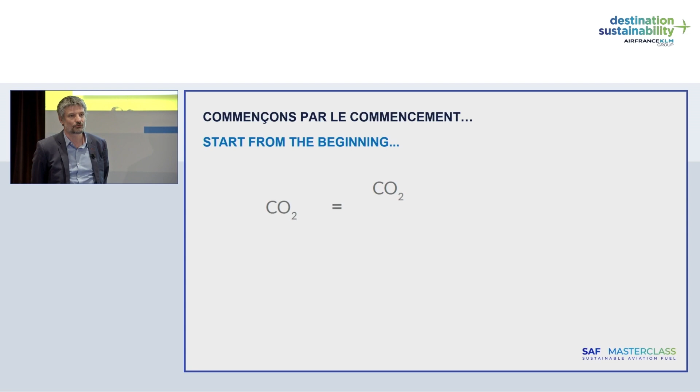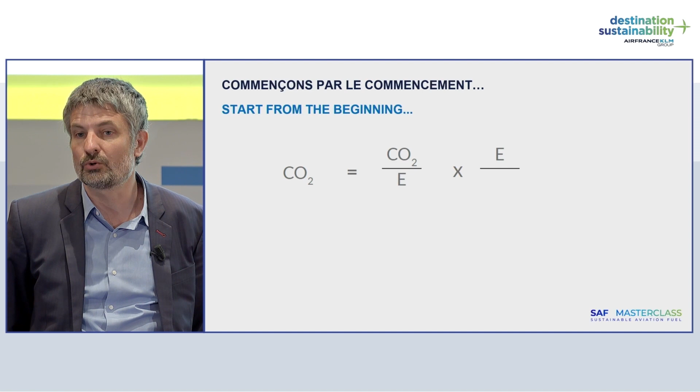Perhaps we can start with an equation that we're going to be building with my presentation. So we can start with CO2 standing for greenhouse gas emissions in the aviation field. CO2 equals CO2, everything's okay. All right, we divide that by energy, we multiply by energy. Energy for the airline transportation business is the fuel to get the planes off the ground. So that's kerosene, isn't it?

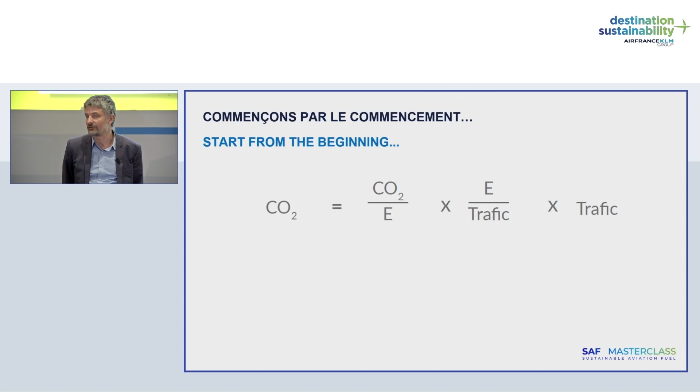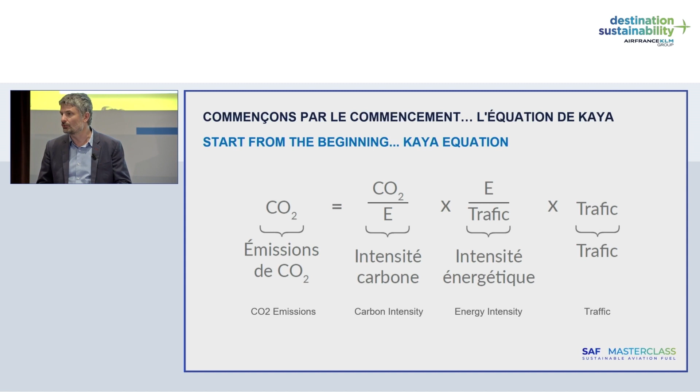Then you divide by traffic, you multiply by traffic. Traffic is the number of passengers per kilometre, the tons of freight that we're transporting in the bellies of our aircraft. And this gives us the Kaya equation. So CO2 emissions equal carbon intensity, in other words, the amount of CO2 produced by energy, the CO2 that's emitted by the kerosene in the bellies of our aircraft, multiplied by energy intensity, the quantity of energy that's required to transport a passenger through a kilometre, multiplied by the traffic.

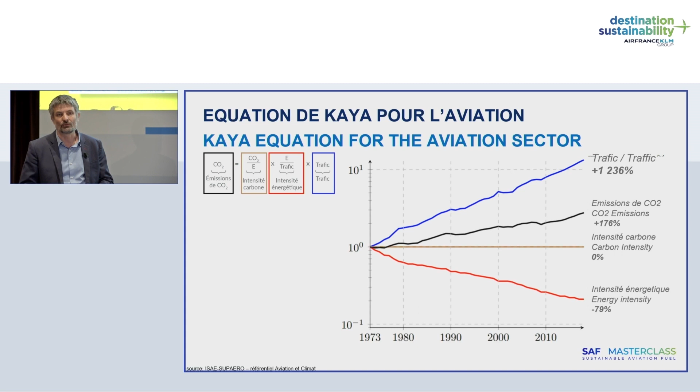So when we try and follow that Kaya equation and look at it over the last 50 years, well, why 50 years? Well, 50 years ago, that was really the beginning of the increase in aircraft traffic. 747-200, I think that was in 1972. Charles de Gaulle, 73, that was the oil crisis as well. And when you put that equation over the last 50 years, we have these four lines, and we'll look at those in greater detail in a moment.

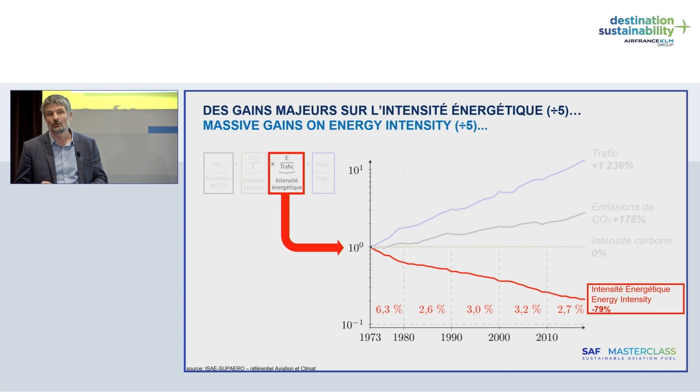So the first is energy intensity, the energy required to transport an individual in the air. This has been cut by 5 over the last 50 years, as we see. How have we got to that amazing efficiency level? With more efficient, lighter, more aerodynamic aircraft, with engines that are bigger, that consume less fuel, more dense, in other words, with more passengers on board, which has enabled us, in a word, to improve things technologically to cut energy intensity by a factor of 5.

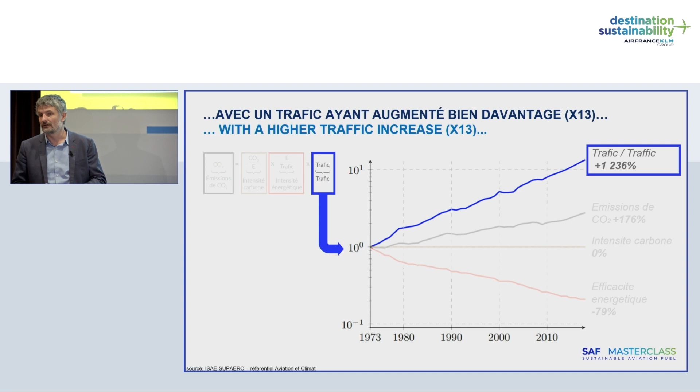Running alongside, airline traffic has been multiplied by 13. In other words, the number of passengers. So we've cut by 5 the energy intensity. If then we multiply the number of passengers by 13, then we have a massive increase of CO2 emissions, which have increased threefold pretty much between 1973 and today.

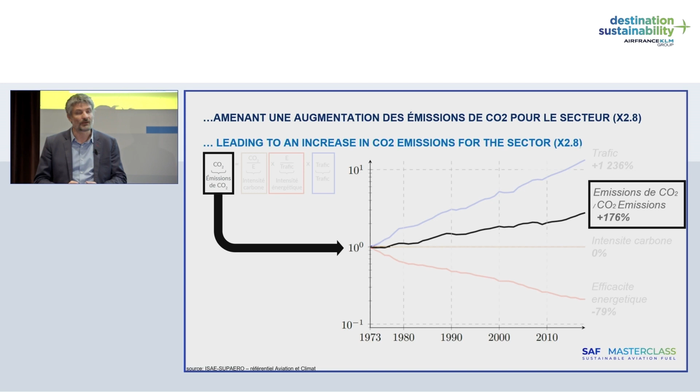Now, you would have spotted here, there is a curve we haven't made much of yet, and that's carbon intensity. In other words, the amount of CO2 which is emitted by the volume of energy deployed. Now, for aviation, energy remains constant, kerosene, and we know that 1 ton of kerosene which is consumed in our aircraft emits 3 tons of CO2. So this hasn't changed for the last 50 years.

That's a hard-nosed fact. And if we want to go bigger and further in decarbonization in the airline industry, it's the carbon intensity that we need to address. And to do that, we need to reach new fuels that emit less CO2. Obviously, this leads us to SAF.

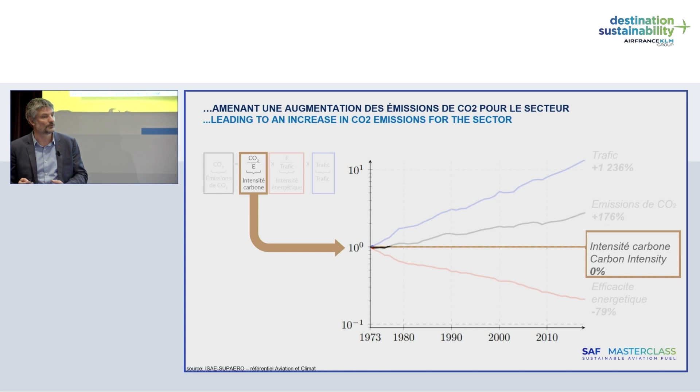So, in respect of that, 4 figures here to put some numbers on the impact of aviation on the climate. 2.6% is the share of aviation's emissions in the world. So that's not a majority figure, of course, but it's still important and we need to address it. Now, these emissions, as we've seen, are on the up, and significantly. And if the airline industry does absolutely nothing compared with other industries that are becoming increasingly decarbonized, then this level of emissions could reach 20% between now and 2050.

Now, in my presentation, we're talking a lot about CO2 emissions, but it's not the sole aviation impact on the environment or the climate. There are also non-CO2 emissions, as they're called. In part, these are white trails that come out of the airline engines and that persist for a while in the skies. So this trail has a heating effect, which is by no means negligible, and there are studies that are trying to properly appraise the non-CO2 impacts and to try and understand how we can reduce them.

Now, this non-CO2 impact is pretty much on a par with CO2 impact, which means an aviation impact of 5% of human-based effects on the environment. Now, if we look at airline traffic for one passenger, let's say, New York, Paris, 1 ton of CO2 emitted, bearing in mind that the average emission for one French person is 8 tons. So that's 10% of the average budget of your average Frenchman.

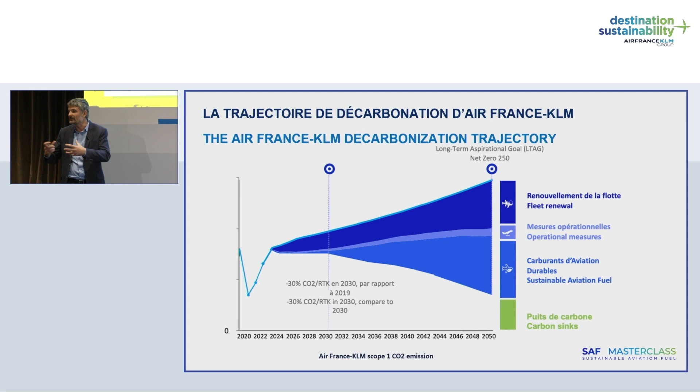And then we have SAF. We think 70% SAF in 2050 equates to about half of the overall efforts the company must make to reach carbon neutrality in 2050. To reach that neutrality point, we need to reduce carbon emissions. Human activity will produce residual emissions, so to reach 2050 neutrality, we need to invest in carbon sinks, for example, artificial capture and sequestration of carbon, or possibly even burying it.

Now, what about SAFs? There are two major categories. Daniel will provide greater clarity in just a moment. We talk about biofuels: biomass, plant-based, household cooking oils, farming and forest waste in the future. The plant captures CO2 from the atmosphere, is used to produce the SAF, that fuel is consumed in our aircraft and emits CO2, which is once again captured by the plant. So a closed loop.

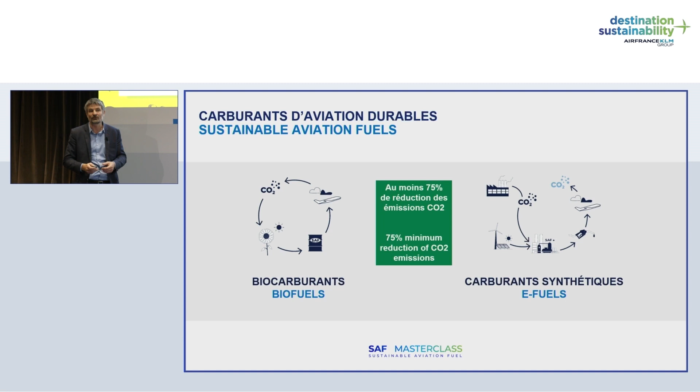Same thing for e-fuels. We capture CO2 from the atmosphere and combine it with green hydrogen produced from renewable electricity. Then we have the same closed circuit. Looking at the overall life cycle of these fuels, we can reduce our CO2 emissions by 75%.

So what are the salient features of these SAFs? First and foremost, very strict environmental criteria. The company wants to use SAF that doesn't compete with food. There won't be any dedicated crops. We want to use household waste, farming waste, or forest waste. And all our SAFs will be certified by independent bodies.

Second important point, this is a drop-in fuel. We can mix it with the kerosene currently used, up to a 50% mix, which means we don't have to invest in new aircraft, such as hydrogen or electric aircraft.

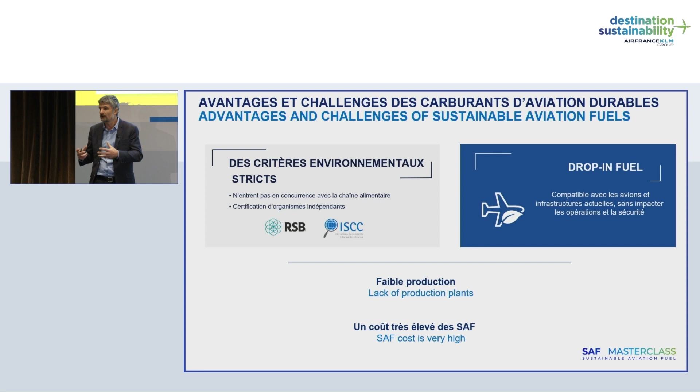There are two major disadvantages to SAFs. The first is very little production. It's estimated that in 2022, 250,000 tons of SAF were produced, 0.1% of all fuel used in aviation in 2022. Very low. The second is that SAF is very expensive today, up to 8 times the cost of classic fossil kerosene, depending on the technologies used. And then a few words on the SAF strategy of Air France-KLM.

Ben Smith told us Air France-KLM are trailblazers with regard to the use of SAF, with the first commercial flights using SAF dating back to 2011. In 2022, with just over 40,000 tons of SAF, as Ben Smith said, we took 17% of worldwide SAF produced, and we have this ambitious objective to attain 10% SAF by 2030.

So how are we going to get there? We've already started to implement commitments over the long term. Air France-KLM has committed to buy 1.8 million metric tons of SAF between 2023 and 2036 with big European and American companies. We've also implemented many partnerships with French, Dutch, and international companies to ensure that between now and 2030, we attain our objective of 10%.

And we've said this, but the cost of SAF with regard to fuel cost, which represents between 20 and 30% of the cost of an airline company, means there's a new economic equation in place with an impact on the cost of a ticket. In 2022, we've already started to increase the price of flights out of France and the Netherlands by a few euros. It's also an investment that can be done by our customers, who individually can purchase SAF when they book. Air France and KLM have also implemented a program for corporate customers, whether freight or passenger, to decarbonize their activity. They can invest in the purchase of these SAFs.

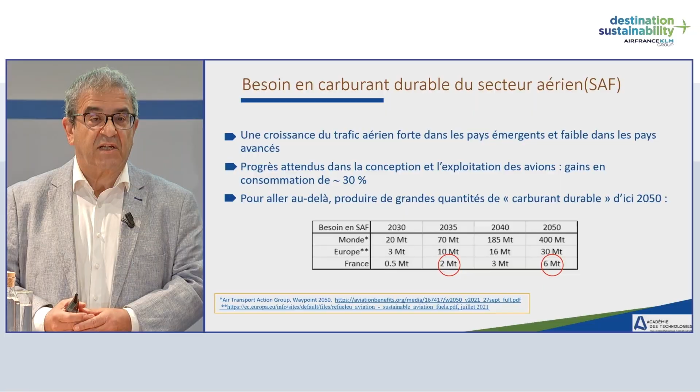So technically, what we wanted to do was compare the needs, the technological possibilities, and where the energy is going to come from — where's the energy that's going to enable us to produce these different types of fuels. The first point is that we need to take into account the technological and technical advancements, as has been said, and then we see what the residual demands are.

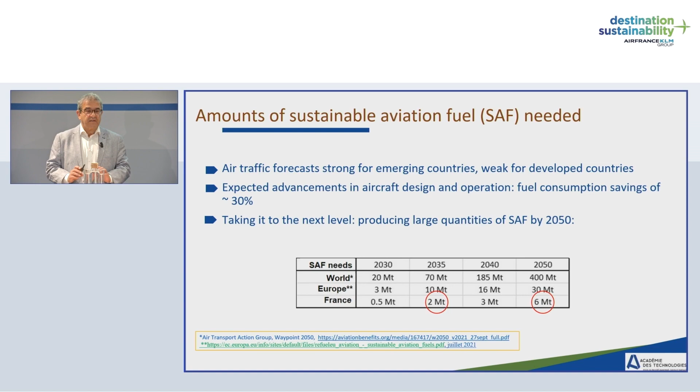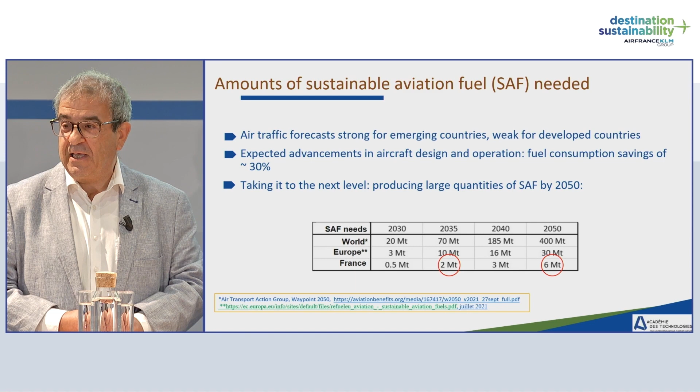The Academy of Technologies is not specialized in the aviation industry, and we were not looking at whether traffic is going to increase or decrease. We looked at the references which exist, and the acceleration is so strong, so massive, that even if traffic is not what is anticipated or forecast — due to efforts around sobriety, economic constraints, or geopolitical constraints meaning traffic levels decrease or increase compared to estimates — it will change nothing to the presentation or the message I'm imparting today, because we are on a steep curve. Whatever occurs, things may change, but the efforts required to initiate these technologies are the same. So even if it's 6 million tons of SAF by 2050, and we're at 5 million or 7 million, that changes nothing with regard to what needs to be undertaken here, now, today, to prepare for this trajectory.

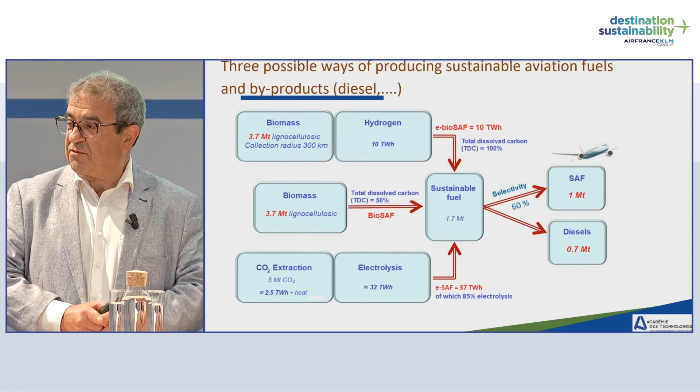We need to produce sustainable fuels. Antoine has said it, but I'll repeat it. It's a fuel which can be totally mixed with current kerosene, and which is going to burn in the same way and produce the same quantities of CO2. So the trick here is that we're going to remove the carbon from the environment, and it's not fossil-based carbon, because that is what we're talking about.

We're going to look for carbon which is within our environment and not use fossil fuel. And we need to not add carbon into the air, because the carbon emitted during the flight has been taken out of the environment such as it exists today.

The most simple way of doing that is going towards biomass solutions. Why? Because if you look at the composition, it's carbon, hydrogen, oxygen. We don't need oxygen, we can remove that, but we are going to really work on the hydrogen and the carbon of the biomass. Two major approaches here.

We've heard a lot that biomass is going to solve a lot of issues of decarbonation for society as a whole, but there are limits. Those limits are about what biomass is in competition with. There's a lot of industries looking to use biomass for major functions, such as food production, biodiversity, and different economic sectors. So biomass is limited from a quantity point of view.

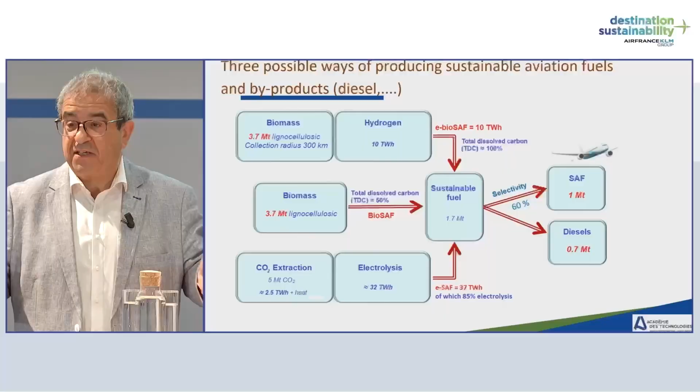So it's good. It's more complicated, and it will take more time to implement because it is more complex, but it will need to be done. But once that is done, even by increasing the yield of biomass by 2, there'll still be the limit of biomass. There is not sufficient biomass to decarbonize all of society, feed the populations, and so on. There are limits. We'll come back to those figures shortly.

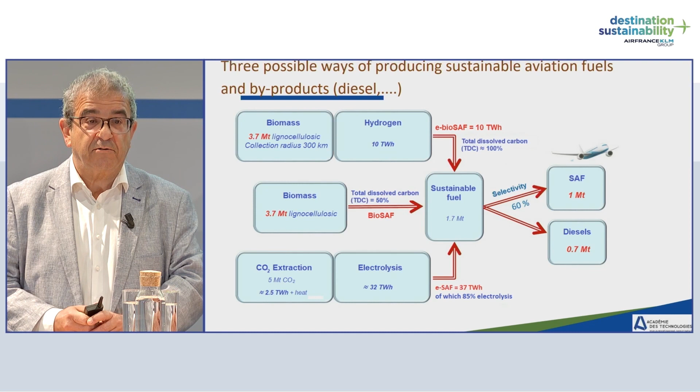Once we've attained that limit, we need to continue our trajectory of decarbonation, because we don't have the choice, and the solution is to take the carbon from where there's a lot of it, far too much: in the atmosphere. Don't see that as a magical idea, because that's what plants do. They pump CO2 out of the atmosphere and fix it in a solid, usable form. So we'll be using technological means to capture CO2 from the air, and associated with hydrogen produced by electrolysis, we can have these SAFs.

So thanks to these figures on the slide, we won't go into detail, but there's a first overview, and I'll focus on France from here on in, because we're going to be talking about the feasibility for our country to decarbonize aviation. Why not talk about other countries? Because studies need to be carried out with the figures in different countries. The capacity to produce electricity changes from one country to the next, as does the amount of biomass. So we'll focus on France. This is one aspect of what is at stake for a company such as Air France-KLM, a big group like that.

So I said you need biomass and you need electricity. How much? And the true question is, therefore, do we have sufficient amounts of biomass and electricity to solve this problem? So we'll look at 2 timescales, 2035, a midterm, and 2050, a long term.

First question, the quantity of biomass available. It's a complicated topic and quite versatile. It depends how it's looked at from a political point of view and what decisions are made politically.

Because of this competition for usage, there are political usages which may translate into rules. So you say this sector can't have access to biomass if you're in competition with the food sector. We've said that providing food is a priority. There's a lot of debate, and this will get ever further with regard to protecting biodiversity.

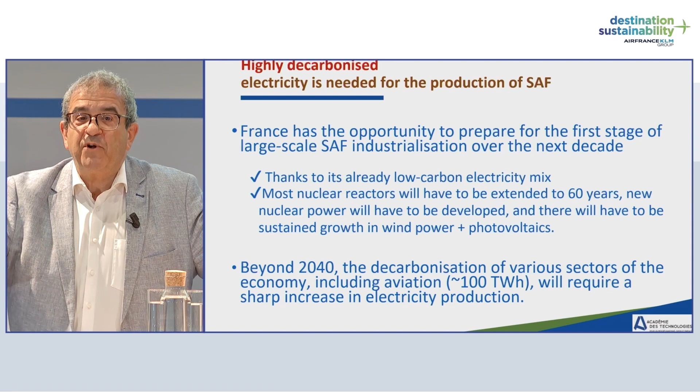The figures I'm giving are only valid if we have electricity which is very decarbonized, very, very decarbonized. The European mix, with 300 grams of CO2 per kilowatt-hour, is excluded—let's not even talk about the German mix. What would happen if we used the average European electricity? SAF would be producing more CO2 than fossil fuels, except you've also lost billions of euros meanwhile because you'll have invested in production plants. So the French mix is a heritage that provides us with an opportunity regarding this capacity to decarbonize and to be compatible with the production of SAF.

So let's look at 2035, because we have a problem of rapidity of deployment. We need to invest very rapidly, but the countries where you can invest very rapidly are those where there's a sufficient amount of electricity available, and low carbon electricity, such as is the case in France, and that's a situation which provides us with this opportunity.

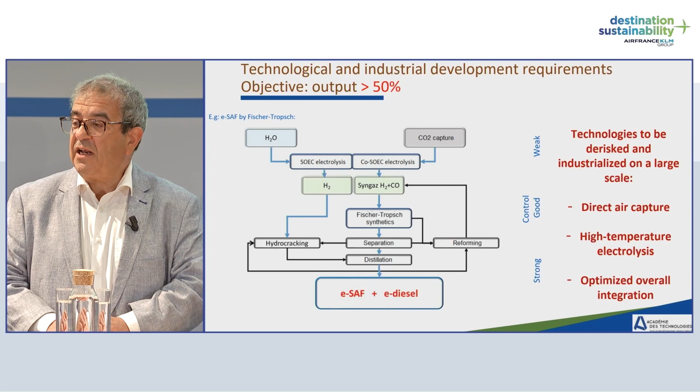It's the equivalent of refineries. Technological maturity is 100%. We know how to do that.

With regard to the middle part there, it's more complicated. We have chemical reactors. There's an example here, which is what we call the Fischer-Tropsch reactor. It was invented by our German friends, during the Second World War, by Germany at any rate. It's a technology which is some 60, 70 years old. So it is mature, but it hasn't been rolled out at big scale yet. It's in that reactor that you can transform carbon and hydrogen into hydrocarbon chains.

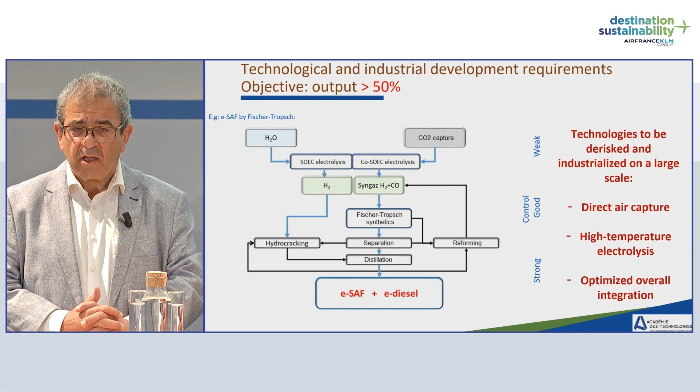On the top here, you see we're not really in control industrially yet, so we need to invest with regard to capturing CO2 from the environment. Those are new technologies. Electrolysis, generally speaking, is a major topic, and the optimization of these installations and plants. Why? Because the yield of the whole of this procedure and process needs to be 50-55%, and that is possible. The technological maturity, we can attain it, but there's a lot of work ahead, and we're not there yet.

This figure of 50%, what is it? It's the relationship between the quantity of electricity that you need to put in at the start and the electricity that you can use in order to have the planes fly. That's ambitious, 50%, no doubt about it, and it will require a lot of technological progress and work.

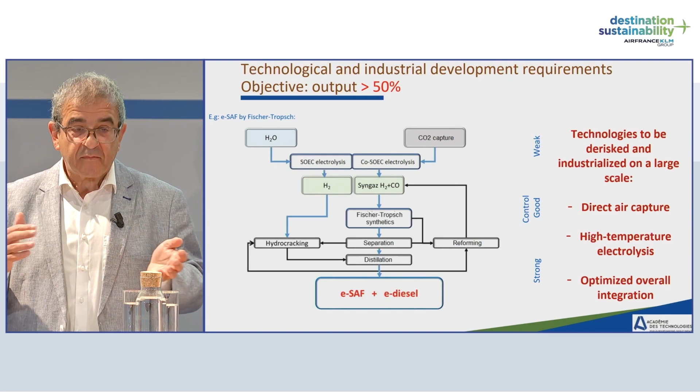If that work is done, we can then assess and evaluate a potential cost of SAFs, notably here of e-fuel SAFs, at 2 euros per litre. Today, we're more at 0.5 euros per litre, so there's a factor of 4 between today's kerosene jet fuel and an SAF which may be qualified as 2040 vintage.

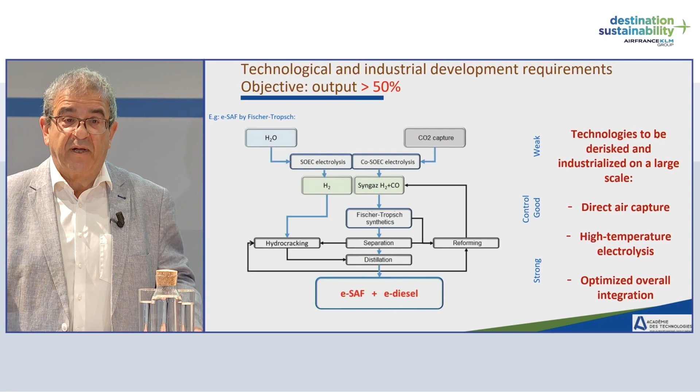But we mustn't just compare the price of SAF tomorrow with the price of kerosene yesterday. That's not logical, clearly. So we also need to anticipate, and that's our analysis, that fossil fuel prices will tend to go up with the growing difficulties of extraction, plus the taxes which will be on them. So to simplify, it will be 4 times the cost of today, but it could be at a factor of 2 relative to the fossil fuel of tomorrow.

So I will conclude. I will conclude with this slide by reminding ourselves first what the stakes are. So what the stakes are for the aviation industry, these stakes and challenges are shared by the whole of society. It's not just one single industry, it's an issue, and this is just an example, the aviation industry.

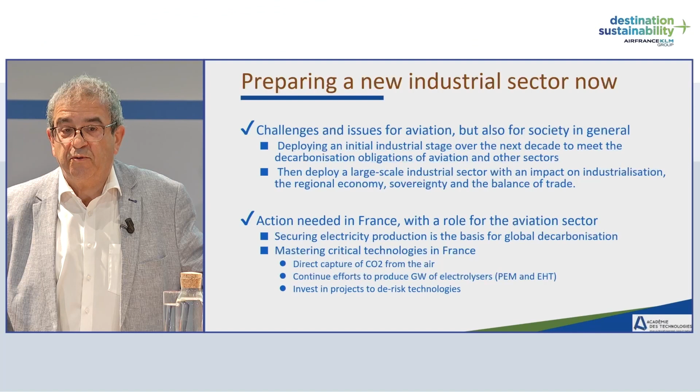So we need to roll out the initial industrial stage over the next decade. All the solutions which are not industrial by 2035 will not be ready for 2050. And that really needs to be looked at and explained to the population. We have a stake that we talk a lot about, but now it becomes a stake of rapidity. We've been looking at thinking, but now we really have to get on this steep curve ahead of us.

This first 2035 milestone needs to be followed by a rollout at a major scale, and that will have an impact on the industries of countries such as France, on the territory, on the commercial balance, because everything that you spend abroad today, you can spend at home, and it will have an impact on sovereignty. So actions which are required in France: you need to secure electricity production, so there's no SAF production without a coherent public policy of energy production. The second one is mastering critical technologies in France.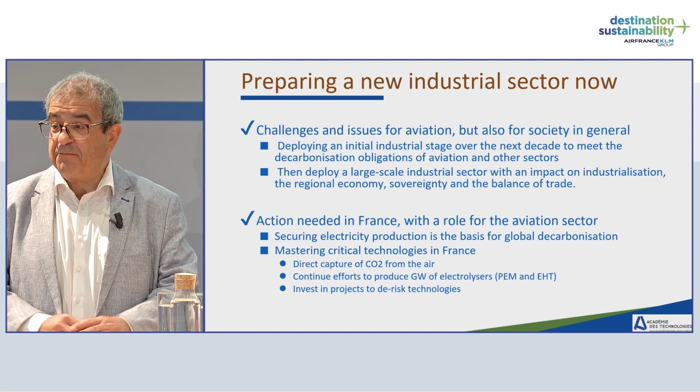So those are really where we need to move forward. It's energy and policies from an industrial point of view and from a government point of view. Of course, the aviation industry is not going to be manufacturing solar panels and so on, but we need to talk to the governments. They can hear all these expressions of needs, but they don't have customers, SAF producers. So there's a problem of the egg and the hen. If there's no major investment on the biomass systems and electrogen ones, there'll be no SAF. But if there's no industrialization of SAF, there's no need for those resources. So we need to move away from this vicious circle, if you will.